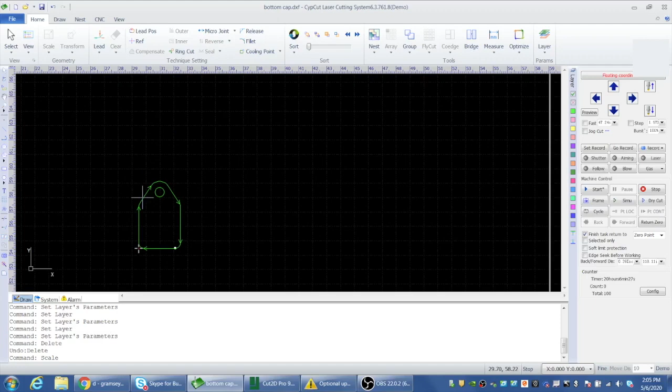Okay, so now on this video, we are going to start putting together many of the things that we've talked about individually in the other videos leading up to this point. You've got the lay of the land, an overview of the interface, and how the different parts of it work. So we're going to do a full project here.

This bracket that you see, I need to cut some of those for a real job for a customer of mine that I've already cut many of, and they need about 8 more of them. So just a simple little thing, but it can show you how to walk through the entire process of getting this cut.

If you're trying to cut a full sheet of something, you'll want to nest, and that's in the nesting part, which we'll cover in a future video. But if you just need to cut 8 of something simple, or 5 or 10 out of a little drop or part of a corner of a sheet, you don't really need to go into nesting. It's complicated and there's more to it, and this is quick and easy.

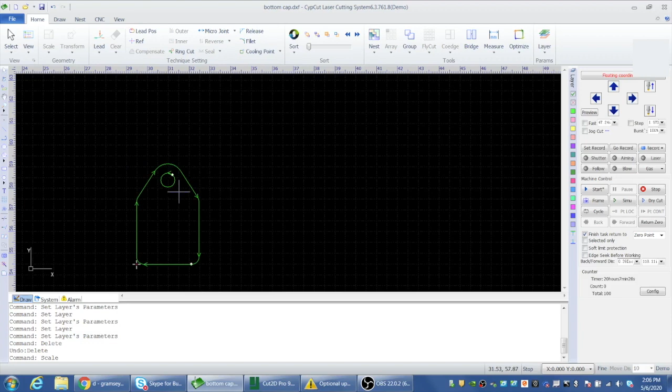So to show you this, I'm just going to delete this and we're going to re-import it. Again, we're going to go up here to File, then Import, then DXF, that's going to bring up our list, and this file is called bottom cap.

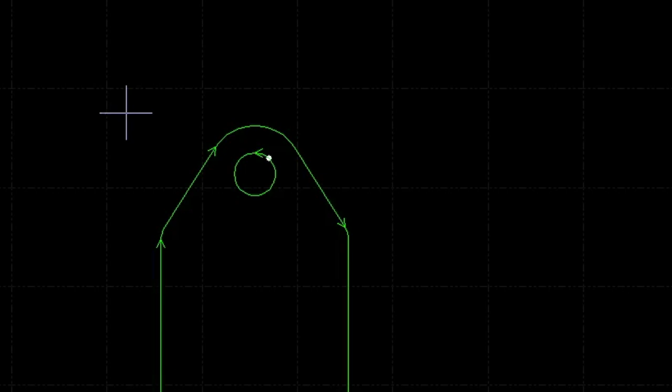I'm using this evaluation software to do the screen capture on a separate PC, not my live machine. For some reason, the scaling is off on this when I import something. This thing should be about 3 inches by 4 inches, and it's coming up scaled off. So this is good because it's going to allow us to show you the scaling again.

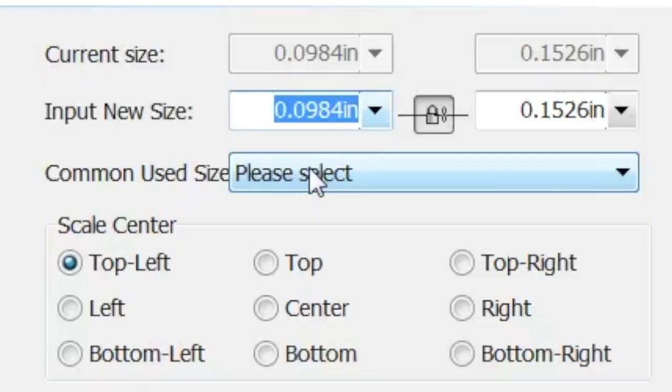So we're going to click Scale over here and bring up the scaling menu. It's not really that critical for what we're doing here. On the machine, I'm going to open it and scale it correctly before it cuts, but this setup part is going to be identical to that. So we're going to rescale this at 3 inches by 4.65 inches, and we now have our newly scaled part.

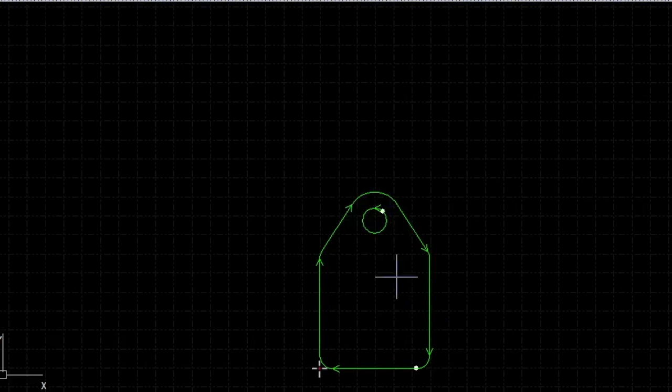So before you duplicate this to create more than one of them, you want to do all your lead-ins and micro joining and anything like that to the individual part. There's a few things that we want to do before we create the array.

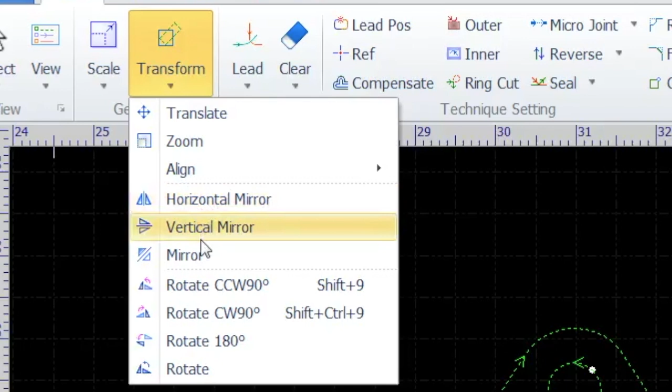One thing I didn't show you yet is you may want to orient this in a different way. So if you highlight it so that everything is selected and then go up to the transform menu, you get some options here that you can mirror it, a vertical or horizontal mirror. You can rotate it, things like that. A common thing to do is just a 180 rotate to flip it around, or a 90 rotate.

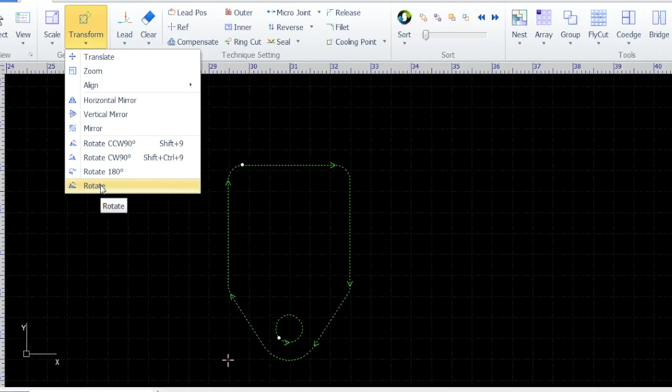You can also click the rotate menu in general and freeform rotate it, and you pick the axis that you want to rotate it on, then grab it and rotate it wherever you want it to be off of that, and pick the rotation point, and then just leave it.

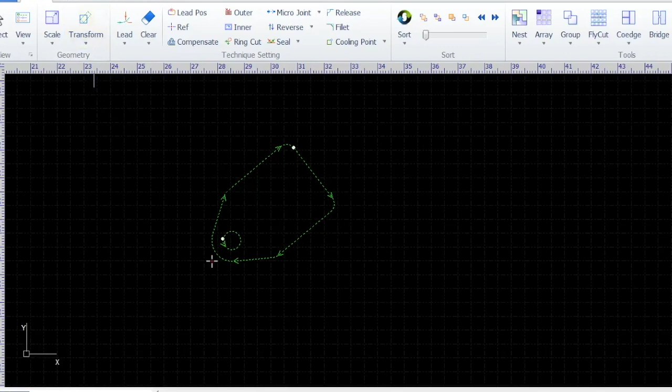But if you ever rotate that and then rotate something else, and then you needed to get this back to square in some way, there's no good way to do that. Once you freeform rotate it, the only way to get it back is just to undo it, and get it back to a square position.

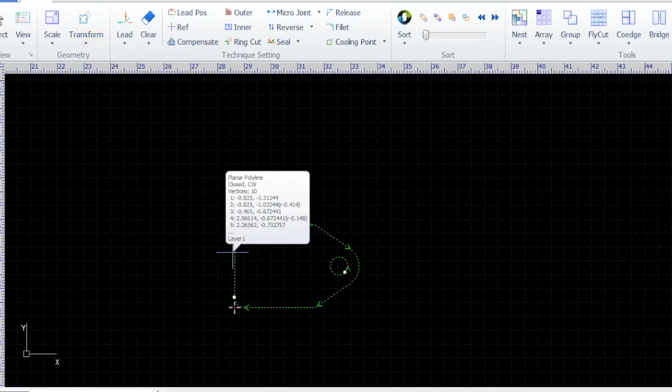So you've got the transform menu and some options there that you can play around with: 90 degrees clockwise, 90 degrees counterclockwise. Again, the 180 degree is a common one, 90 and 180. So just go ahead and get it rotated or oriented the way you want it before you duplicate it or array it.

I'm going to put that back in that position. So here's something that you may commonly want to do.

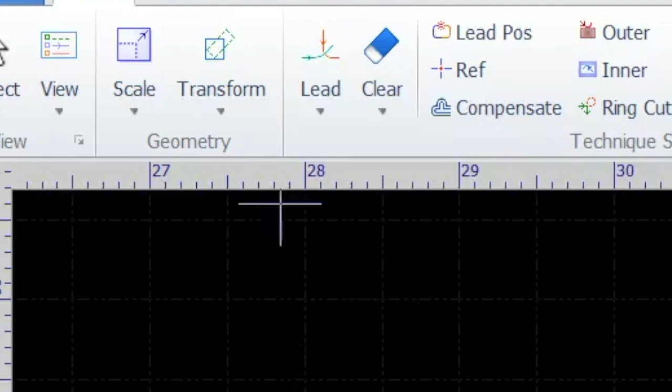Let's just say that if we go up to scale, we can see that this hole is a clearance hole for a 5/8 bolt, and it's 0.66 inches. Let's say that you wanted that hole to be a little bit bigger, maybe 0.7 to give us a little bit more wiggle room.

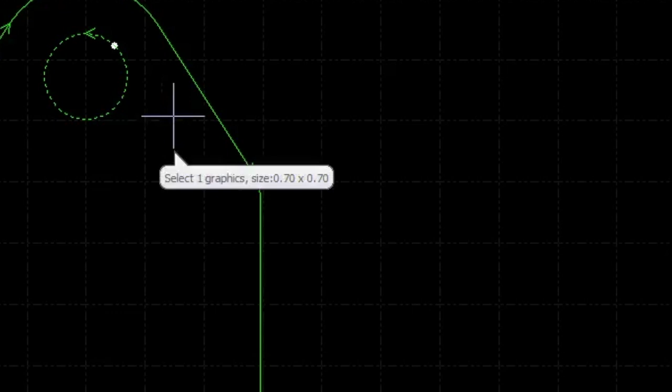If I just click 0.7 and click OK, and if you watch the actual hole, you're going to see that it offset it to the right and down. So let me undo that again and go back to scale.

You want to use this area right here if you're going to scale a bolt hole to make sure that you scale it from the center, so that it keeps the center line of the hole, or the center point of the hole, will stay the same, and it will enlarge outside the center. Let's make it bigger so we can see that actually in action better.

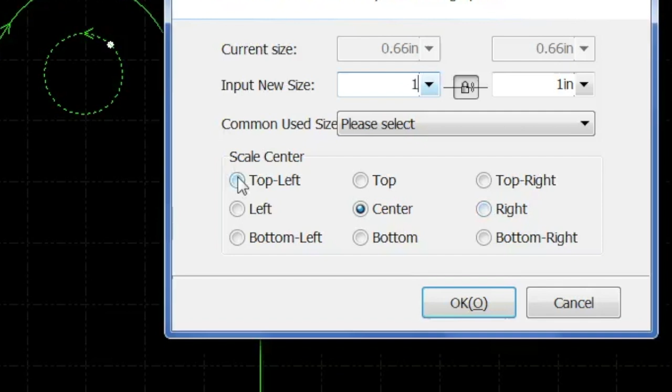So I'm just going to say 1 inch, and I'm going to leave it in the top left so we can see. You see how it's now offset it from the part.

And we'll go back again, and we'll make it 1 inch and then say center. And now you see it's centered up, but just a lot bigger.

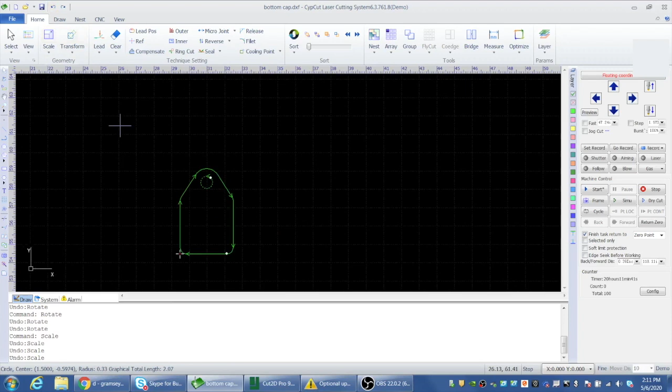All right, so that's something that you can do on the fly if you're doing a small job and you forgot to do it in CAM or things like that.

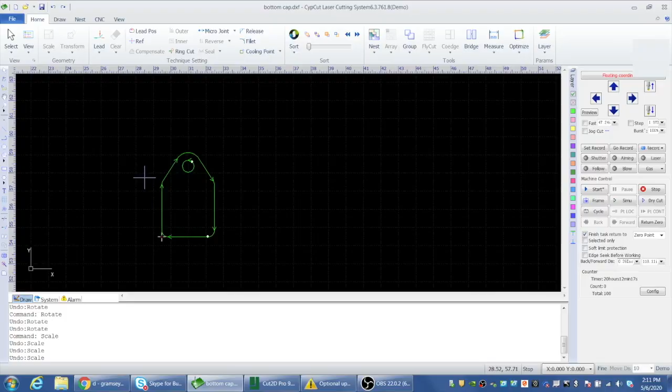So one other thing I haven't shown you is that by default CypCut does not offset for the kerf. And when you're cutting thin materials, the kerf is so tiny that it doesn't really matter. You can cut 20 gauge and not have to compensate or offset anything. Just open it up and cut it and let it cut. You don't even have to do leads.

But on thicker materials, if you want to get a hole dimensionally correct, you need to compensate for the kerf, or offset for the kerf. So we're going to highlight the part, and I'm going to bring this up here close.

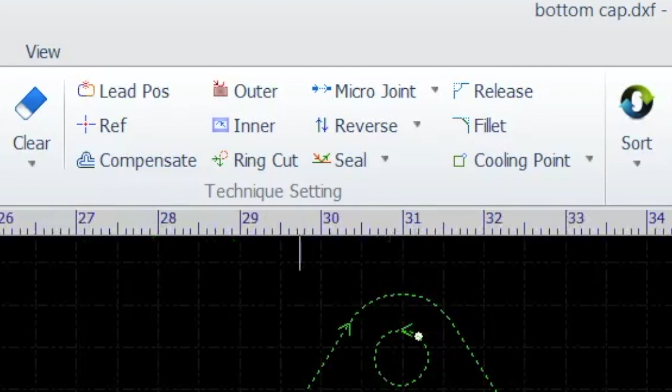And if you notice up here, there's the compensate button, and it brings up a dialog box. It's pretty straightforward, pretty simple. Over time, what you're going to learn is for a given thickness of material, for a given nozzle size, how much do I need to offset it?

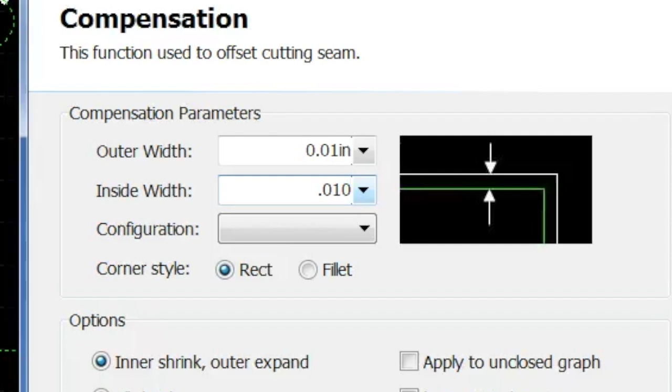Maybe you would want to offset the inside only, or maybe inside holes or offset holes only, that kind of thing. But let's just say we want to do a 0.010 offset. Again, your laser head, the thickness of material, all those kinds of things are going to play a factor, and you're going to have to do your own experimenting, cutting some sample parts to figure out the correct offset to get the part dimensionally correct.

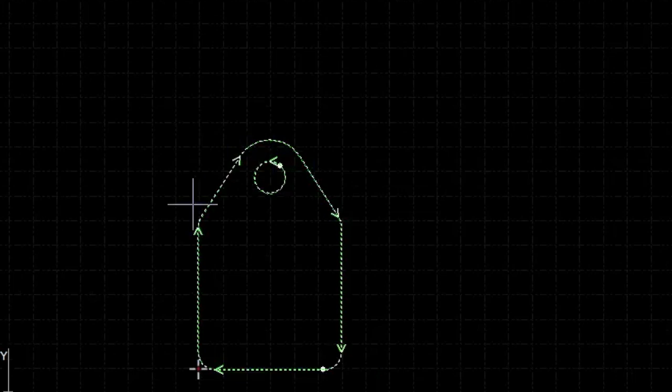All right, so you see when we click that, if you zoom in here, you'll see that now we have a slight offset. It's going to cut the inside features offset to the inside, and cut the outside features offset to the outside. The white line being the cut line and the green line being the original design of the part. So again, before you do any duplicating of the part, go ahead and do your offset.

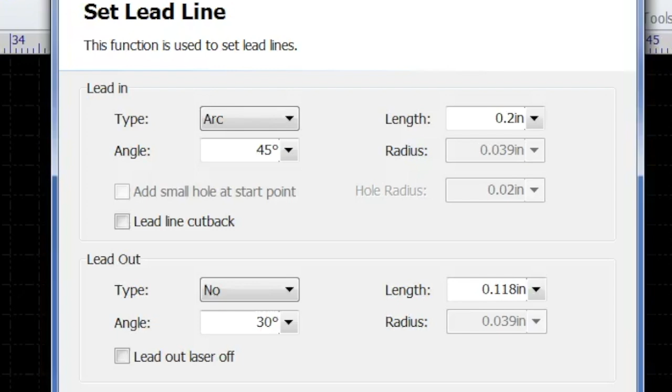The next thing you might want to do is put a lead in and a lead out. We've already talked about this a little bit, but we're going to go ahead and set the leads on this. We have an arc, 45 degree lead, and it's 0.2 inches. I'm going to come down here and check outer contour only, and this will save us a little bit of time. So we're just going to click that, and bam, there's our outer.

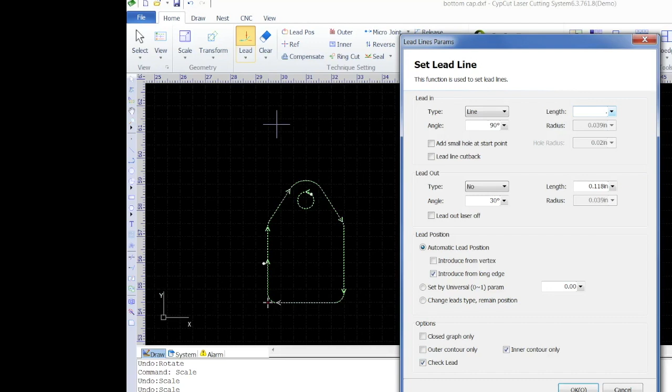And I'm going to click lead again, and I'm going to uncheck the outer and check the inner. I'm going to go up here and make this a line lead at 90 degrees, and make it half the dimension of the feature. We know that hole is 0.66, so I'll just make it 0.3 to get it pretty close to the center. And bam, there's our lead for the center.

So now we've done all of our work to the individual part, and we know we want to cut 16 of them. So again, you want to highlight the part so it's selected, and you want to come up here to the array tool. If you've used any other CAD or CAM software and you know about arrays and so forth, you know how to do it.

We want 16 of these, so we're just going to make it an equal 4 and 4. And right here you can set the row and column interval, or offset, for how far apart you want these to be spaced. Normally these are going to be cut out at a 1/4 inch, so I use 0.2 on 1/4 inch. It's pretty safe to use the thickness of the material as your offset amount. And here you can pick the direction.

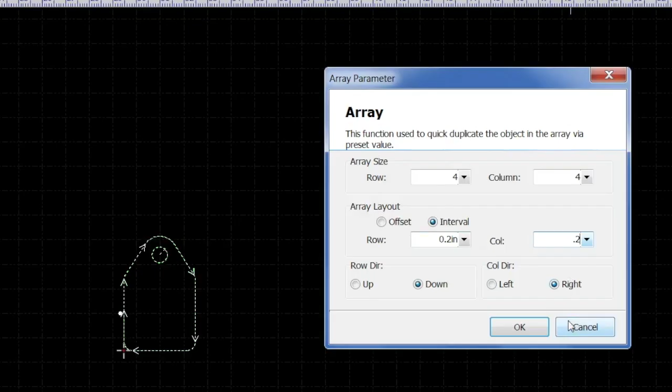I found these things not to really matter with the way the machine works. It doesn't really matter which way it arrays it, because you're going to cut it from the origin point down here, left and right, based on how your machine's origin is set up. And that's it, you just click OK, and there's our 4x4 array.

You can see our lead ins are in a good spot. They're right in the middle, it's going to pierce in the middle of the open area by an amount that's safe, and so we're good to go from there.

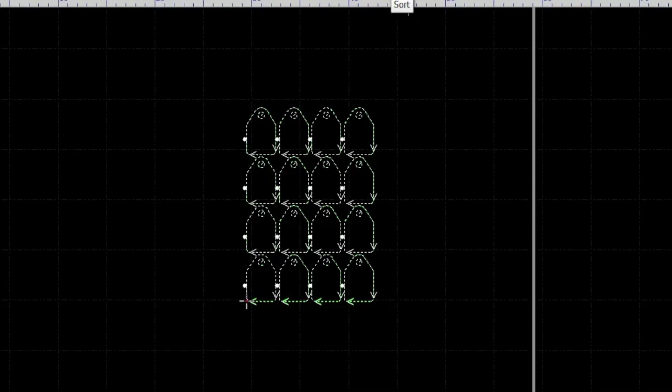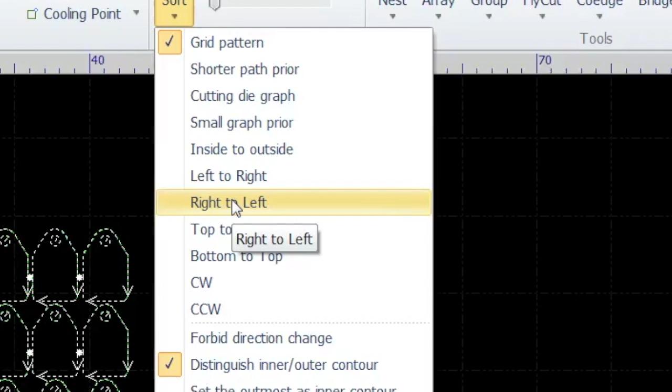And one thing I haven't shown you yet is the sort order. Again, if you're just cutting simple things, it's probably not going to matter. When we get over to showing you the nesting, there's a separate sort method over there. But let me just show you the options on this. You've got several predefined options that you can do, and there are some best practices on this, and some schools of thought about which way is best, of what the choices are. But I'm just going to say bottom to top.

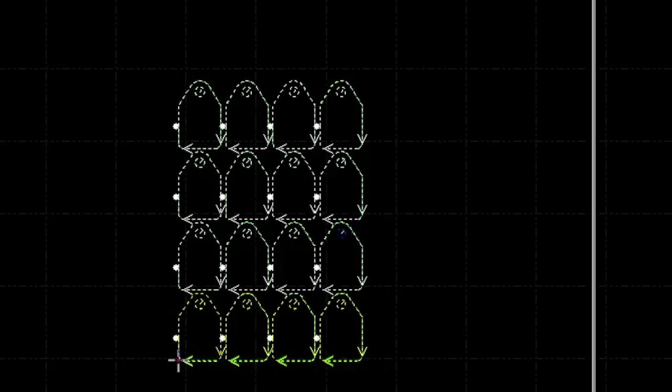If you want to do a simulation to see how that's going to work, you can grab this slider here and see it simulating. See it's going left to right, bottom to top, and zigzagging back and forth for the cut. And if we were to change this left to right and do it again on the simulation, you'll see now it's going to go up and over and down from left to right.

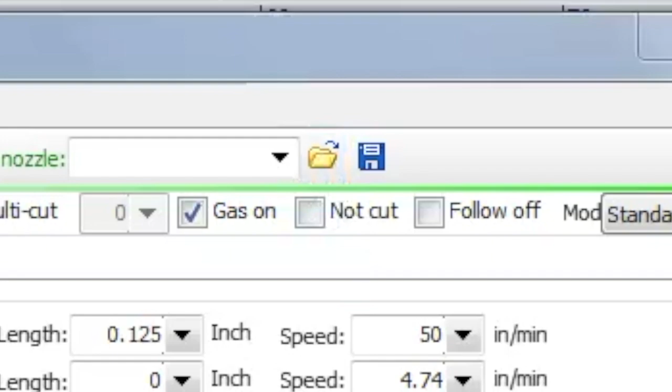After that, we're going to pick on our layers. If you've got a predefined layer already set up, go right here to this little open folder, and it's going to give you a warning telling you that if you read this, it's going to blow away your current settings, and you say yes. You go find we're going to cut this at 1/4 inch or 6 millimeter using oxygen, pick that and open it, and bam, it's going to bring in our settings.

From that, we're going to flip over to the machine, and I'm going to show you a little bit more about the positioning and the setup, and we're going to cut this job.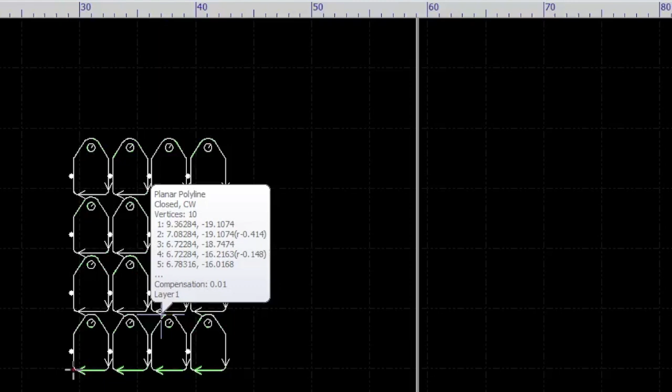Okay, so we've got a drop setup that we want to cut those parts out of that we went through on the simulation software to show you all the details of the features. I had to change the nesting around on the production machine out here a little bit to fit that drop.

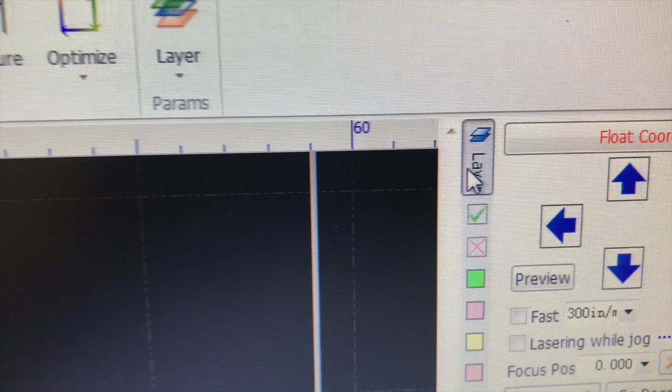So from here, just like we showed you there, we're going to click on the layers. That's going to bring up the dialog box. We're going to go right here and open our folder, and it's going to give us the warning message.

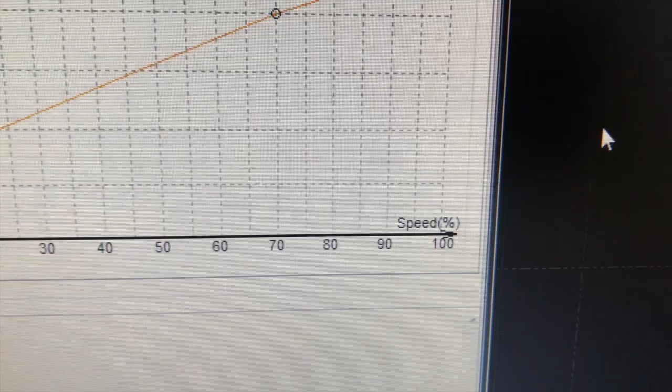And from here, we want to pick on our 1/4 inch oxygen and say OK. Now we've got our layer opened up for that.

Again, this is a really good dialed-in set of parameters to cut this with, and you'll be getting a copy of that when you buy the video series.

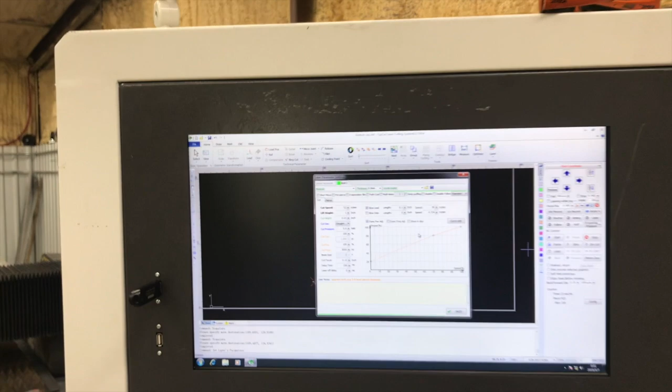So from here, we can check to see if this will fit our drop. But it's kind of tricky with an odd size drop, because if you just do the frame command like we showed you in the other video about the remote, you'll see that it'll frame it out off the drop.

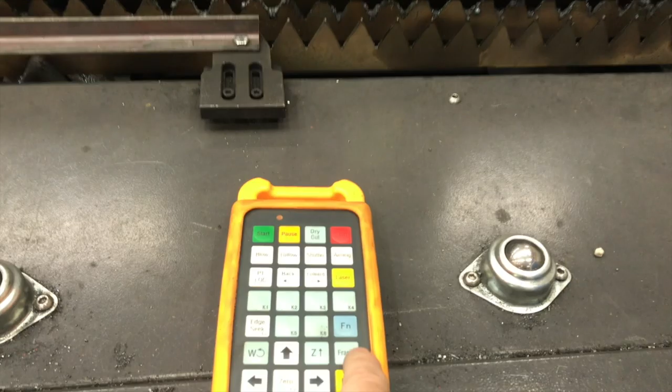So I'm going to hit frame here. You can't frame it without the... if you ever hit a button on the remote and it's not acting right and not accepting the input, it means you have something open on the screen. So let's go back and hit our frame button here. See, it frames it off outside the screen.

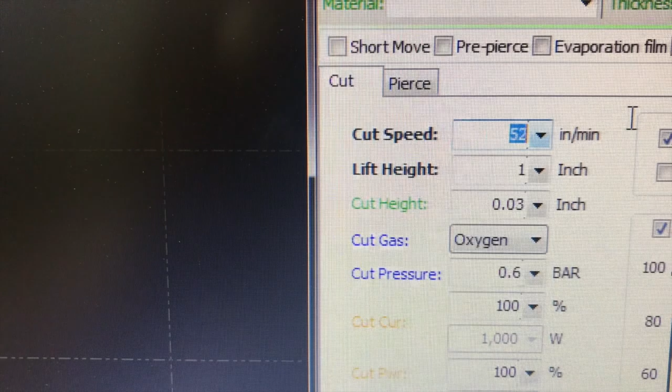So what we need to do is a dry run, but we don't want to do a dry run at the speed that we normally would cut 1/4 inch at. So real quickly, we're going to go into our layers, right here to the speed, and I'm going to make this 300. You got to remember to set this back before you do the cut.

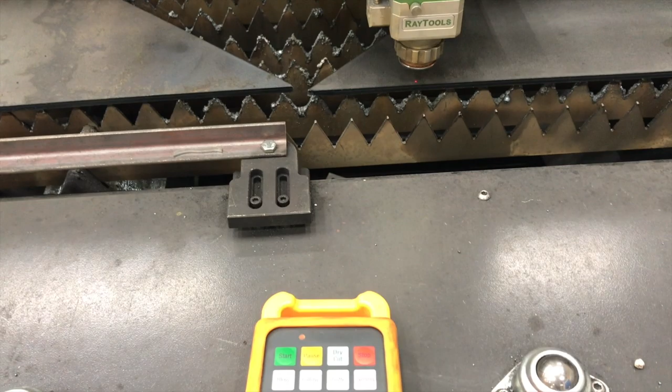And we're going to do a quick dry run just to look at it and make sure it's going to cut that on the sheet where we want it. So dry cut right here instead of frame.

So we're fitting that all in. We're going to maximize our drop and use almost all of it. It being an odd size drop, it's working out well. Got two more to do up here.

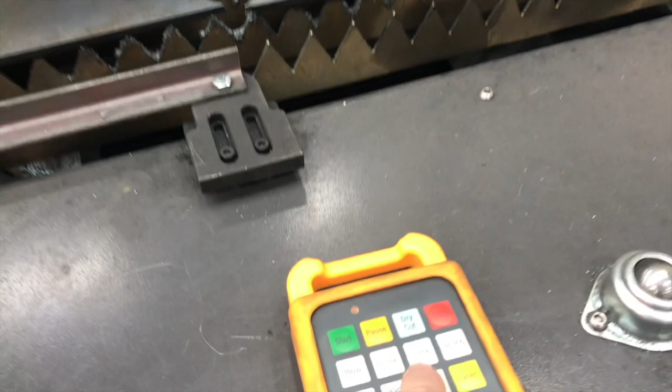And you see nowhere did the shutter go off the edge. So we're ready to cut that now, and I am going to turn the shutter off, because as we showed you in the earlier part of the video, it won't cut with that on. From here, you want to return to 0.

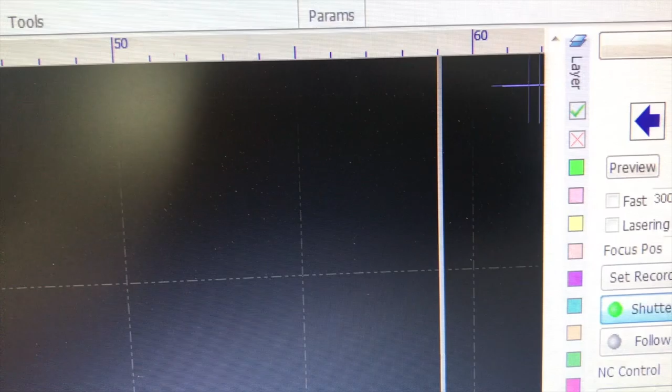So it puts the machine back where we left it, and we want to go back into the layers and change our speed back to 52. And we are ready to cut the job.

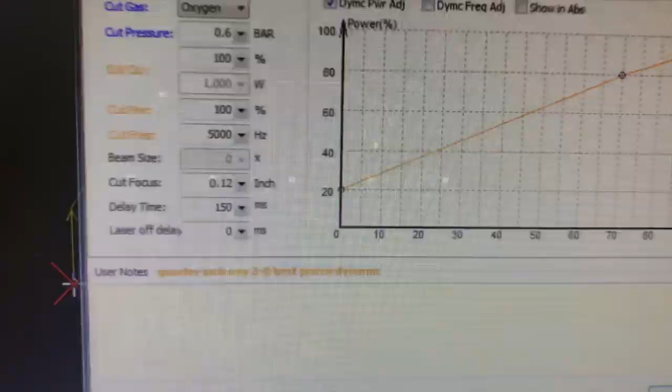So let's get it fired up and cut it. We're going to cycle start it and watch it cut.

Now that piercing routine, I'm going to have a dedicated video in your series here that you're going to watch a little bit later on how to dial in your pierces for thicker materials. But you can see we're getting some good cuts there, and we'll let those cut and wrap it up here at the end of the video when they get done.

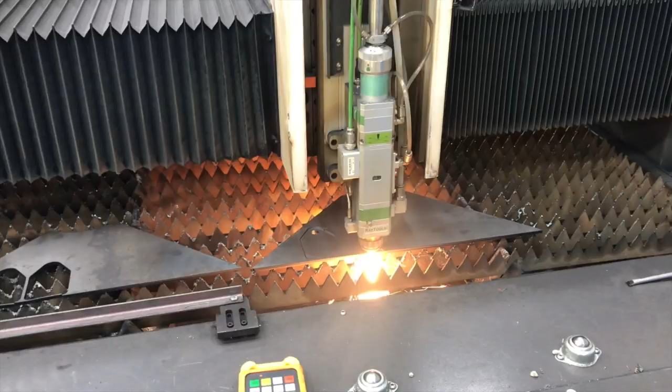All right, you see we maximized our drop and got pretty much everything we could out of that. And there's our parts. Got nice cuts on those.

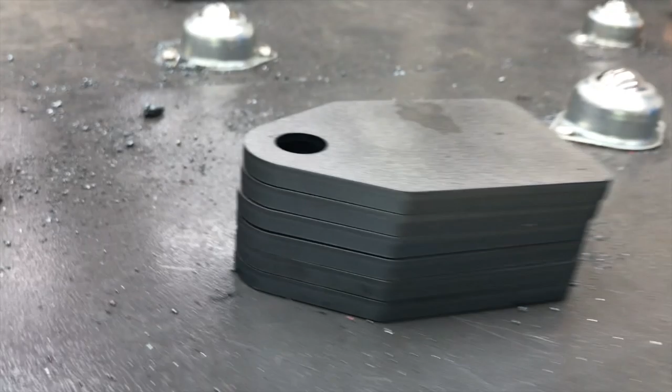So just a quick review, we walked you through doing an import of a drawing, scaling the drawing. We talked about transforming the drawing, rotating it, and then we set our individual leads, compensation, offset, all those kinds of things at the individual level.

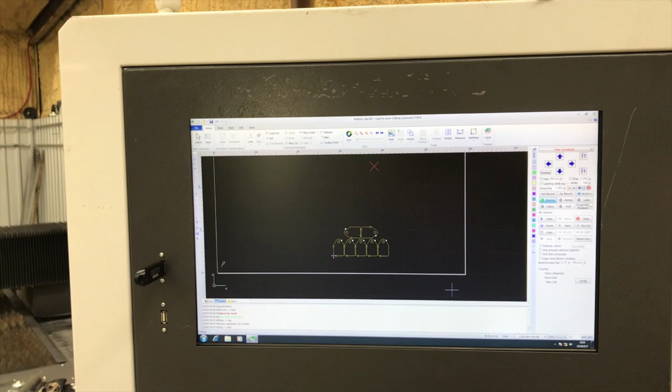And then we went into our array tool and arrayed the parts in a grid, and then framed it out and cut it. Start to finish, an entire small production run of a job, cutting a few parts out of a drop.